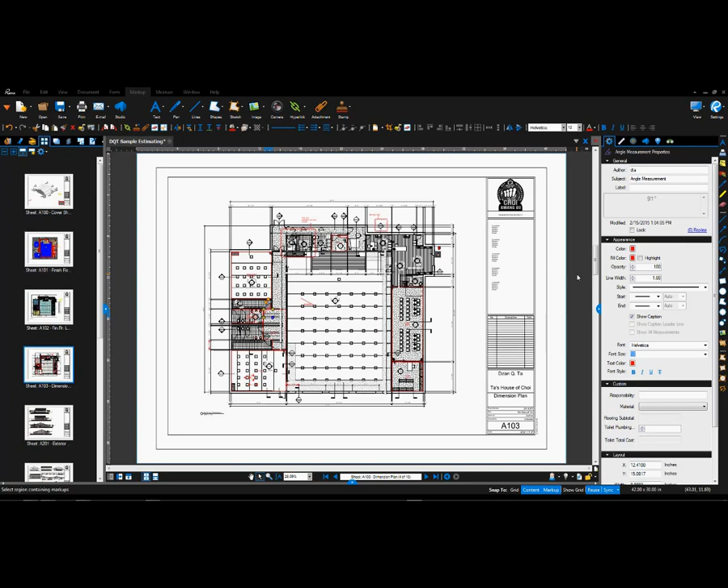Here I am in Bluebeam Revu 2016. If I zoom into this area, I would like to take a snapshot of the entryway, put it on a punch pre-made PDF file, and start to punch it. How do I do this? In the toolbars, one of the icons that you have available is called Snapshot.

Start the command and draw your region that you want. It could be rectangular or polygonal. Once you have defined that region, it is temporarily saved into Windows memory.

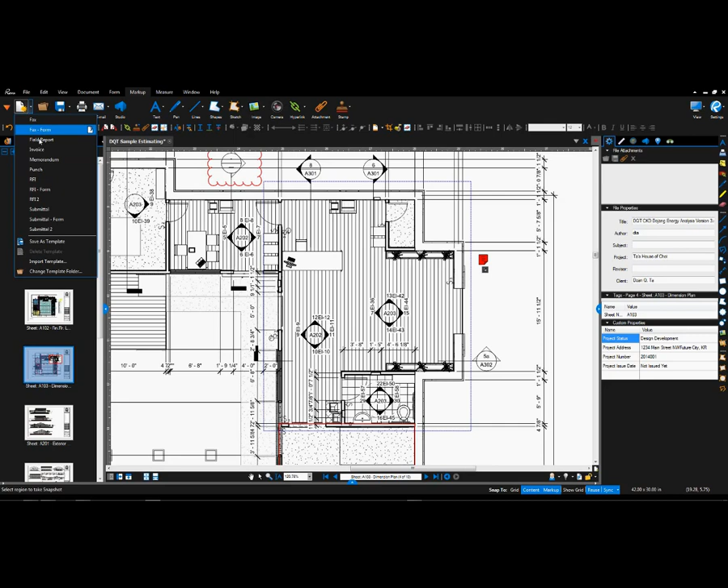From there, you head over to the new command for creating a new PDF file. Click the white arrow and choose Punch. This gives you a new PDF file based upon a pre-made PDF template called Punch. And this one's very simple. It just says Punch and it has project name, number, things like that.

You can make your own template file, by the way, and place it in this location to use instead of the default one. For the purposes of this video, I'll just use the default one. I can right-click anywhere that I want on the sheet of paper and paste that temporary image. I can then place it on the sheet of paper and size it to whatever desired size that I need.

Now, as it stands, that image is not scaled. So in order for us to punch it and mark it using measuring markups, we want to make sure that those measurements we put in there are scaled properly.

In order to do this, we head over to the Measurements tools and we calibrate the file. In Bluebeam Revu, we can calibrate the file both horizontally and vertically as one, or independent of each other. I will just do the calibration off of a single calibration.

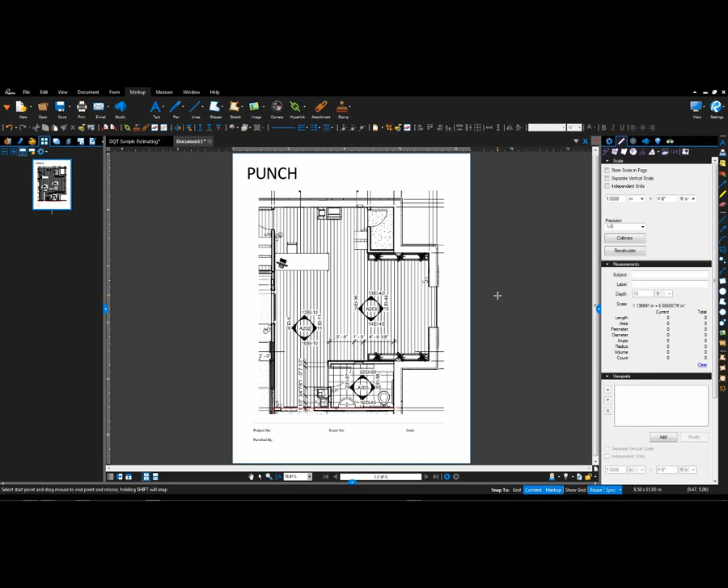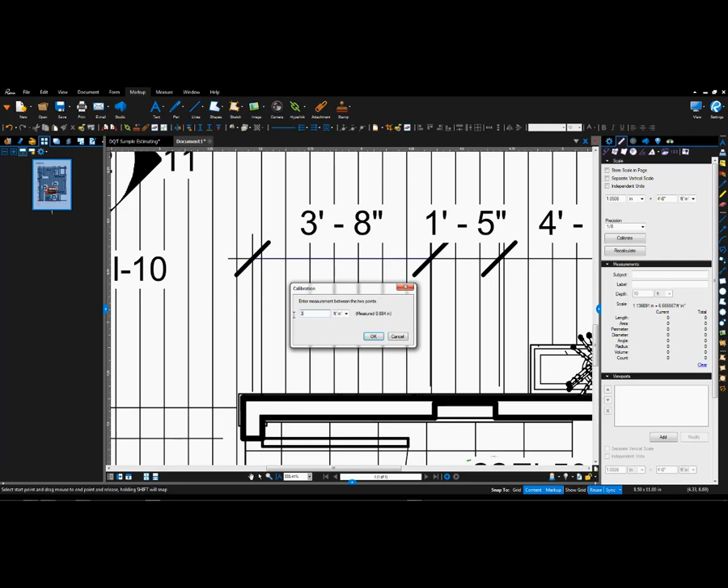If I zoom in here, I can see I have a dimension that's set at 3 feet 8 inches. If you have snaps for markups and content turned on, it'll help you out a little bit better. I'll click here, hold the Shift key to make sure I'm moving horizontally perfectly, and then click this endpoint. This distance that I'm specifying with the two clicks should be that 3 feet 8 inches. I'll click OK, and now it's defined.

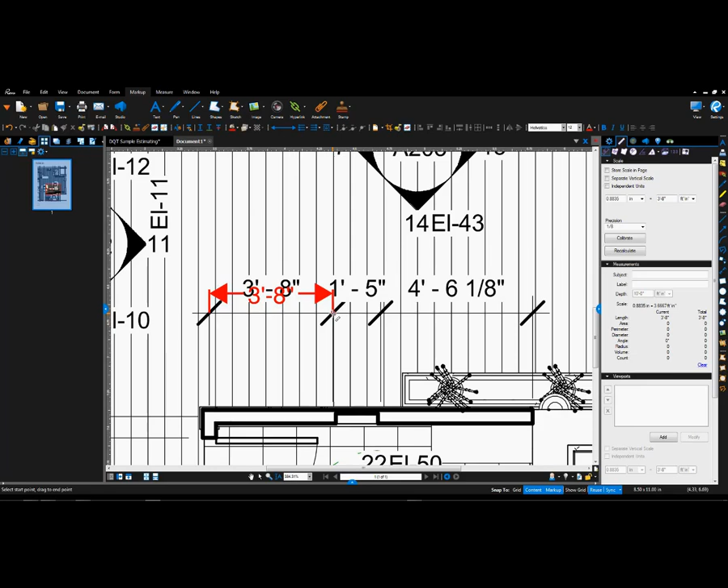In order to verify that it's measured and scaled and set up properly, I can just use the length command to dimension from that point to the other point, and it reads as 3'8". I would also verify with other dimensions that it's reading correctly, both horizontally and vertically.

So here we have a dimension that is 7.5 inches. I'll click here and here, and it says 7.5. So I know now that this image on this sheet of paper is set up properly for any kind of measurement markups that we'll do. I'll create another video just for measuring commands in Bluebeam Revu, so you guys can watch that later.

Now that I have the image placed, I can go through the process of punching it. I'll head over to the lower right-hand corner, go to Profiles and use the Punch profile. Or I can make my own profile.

Because I switched to that, I can open up the tool chest, and I have a lot of punching tool chest configuration files already set up. I can expand any one that I want, for example Punch Key Floor Plan, Flooring, and I can see we have a few here to work with.

All I need to do is left click and drag and drop, or click and drop, and that information gets punched. If I select that markup and go to the properties, you'll see it says Tile Replace Chipped Piece Replace Grout. That's TR. And it has all the property information.

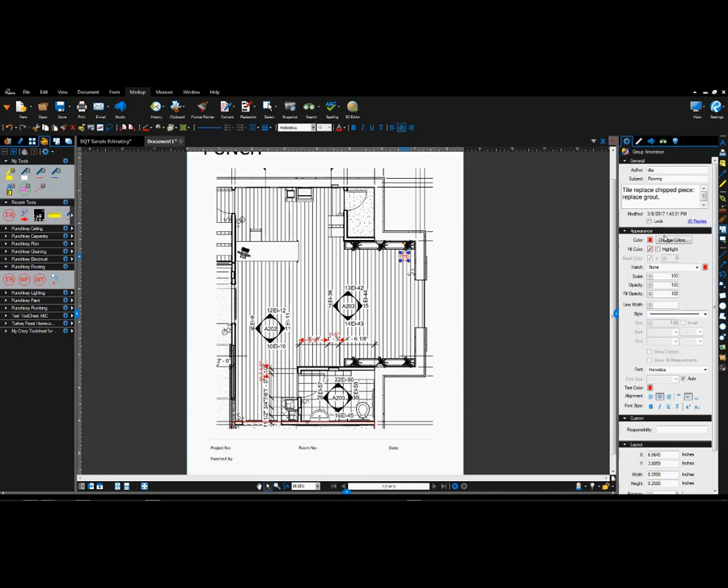We can make our own. Let's say, for example, we want a punch symbol that says replace decorative planting, something like that.

I would take this markup, Control-C to copy to the clipboard, and then Control-V to paste it. Place it where I want, then go to the properties and make any changes that I need to either the graphics or the text.

And then also the text itself we want to change, and the description inside. So we'll say replace decorative plants. And in here, we'll double click where it says TR and we'll say RP, something like that.

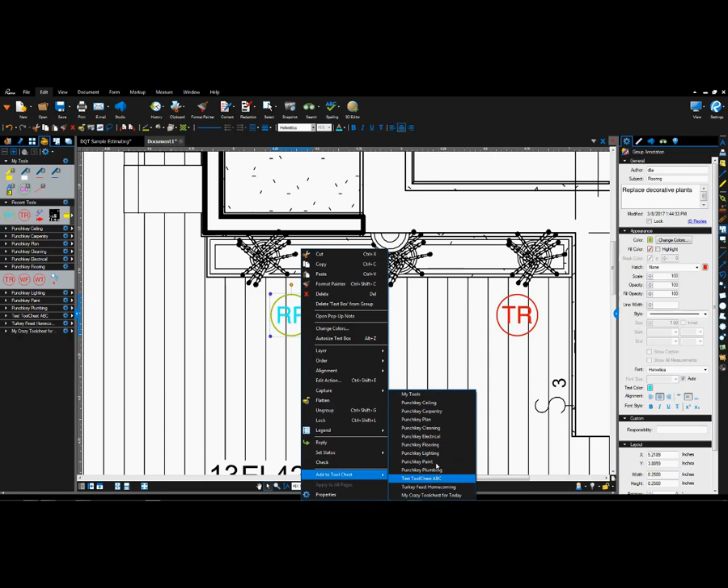And so now that I have that custom one created, I can actually store that and reuse it. I can select that markup, or any markup for that matter, right click, and then add it to the tool chest of my choice. I'm going to place it under my tools. And now it's here, so I can use it all day like this.

And so this is how we go through the process of punching the job. Use all the different types of Punchkey icons that are available for you to use.

Now in this tool chest, I can click this Master Manage Tool Sets cogwheel to get to the Manage Tool Sets window, and it will display all the other tool chests that may not be visible because they're not checked. And if I uncheck it, you won't see it, and if I check it, you'll see it.

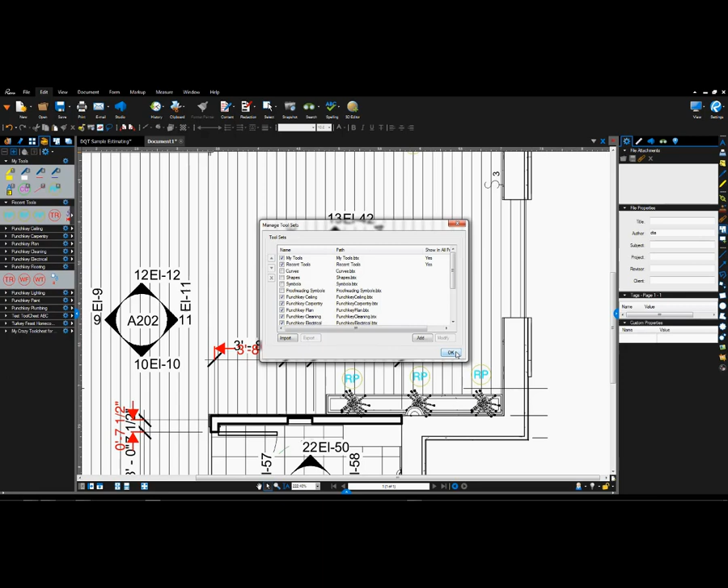So for example, if I click Curves, it's now visible. If I uncheck Curves, it's no longer visible. I can either add a new one in, or I can import in some new ones as well. The Bluebeam tool chest files, BTX files, you can get them for free from Bluebeam's website.

If I open up my Windows Explorer, I'll head over to my Bluebeam, and I'll head over to my set of files, and I have a whole bunch of them already downloaded. I can go over and select the one that I want to use, say for example Paint Punch, and if I double click it, it will automatically load it into Bluebeam Revu, and it shows you right here, Punchkey Paint.

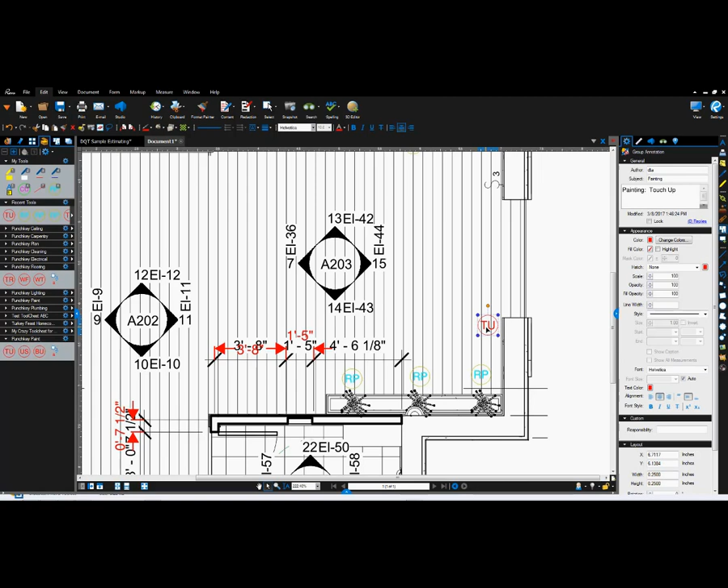So if I click and drag this, I can place it, and if I look at the properties of that markup, it says Painting Touch-Up. So this is how you go through the process of punching a room using Bluebeam Revu.

Remember, all of your markups that you place for that file are being tracked under the markups list, and you can export that out in various formats. Thank you very much for watching.